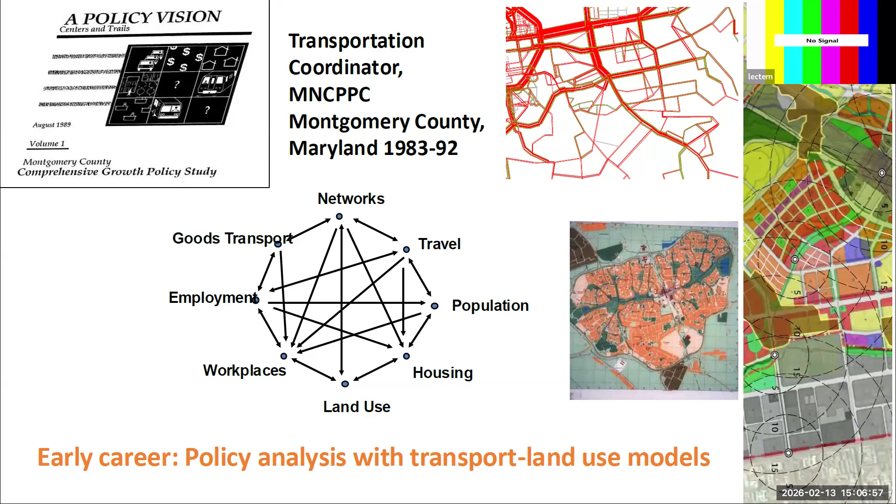And since then, these travel models have continued to evolve. I've moved, frankly, beyond regional travel demand modeling and think most of these are basically illusions that we're creating about the future being just a projection of the past, and that we're far better off developing public policy analysis frameworks that are grounded in what kind of future we want, and then figuring out how to achieve those futures through appropriate kinds of investment and policies, and then using these analytic tools to help us figure out how to get there, rather than using the tools to simply justify widening more roads, which is how they're mostly used.

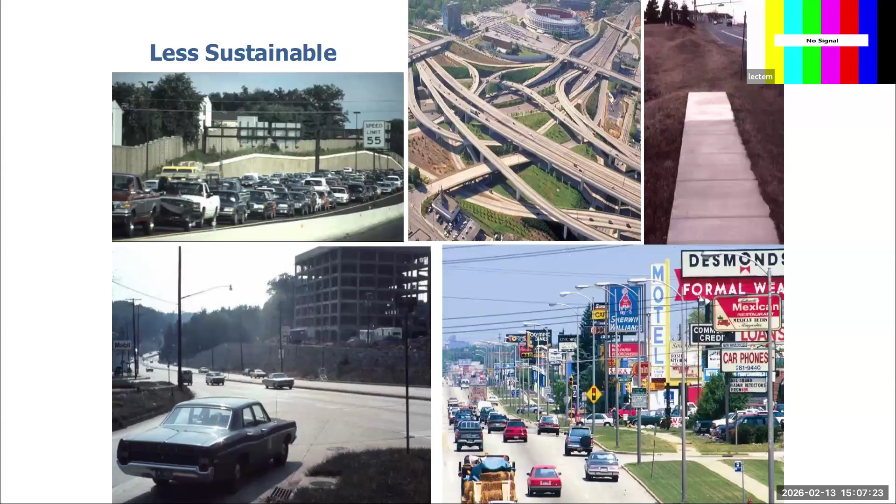So all of this comes down to a few different paradigm elements of what's less sustainable: sprawl, investment in more roads that lead to more traffic, sidewalks that go nowhere, and more sustainable patterns where we better manage street space to favor public transport, walking, and cycling, and concentrating development around those patterns.

While I was at the Park and Planning Commission in Maryland, I developed a campaign called Bikes Not Bombs, where we recycled over about a 5-year period 10,000 bicycles to teachers and health workers in Nicaragua, and used that as a way of countering US policy, which was attacking a left-wing government there that was promoting health and education. We developed bicycle assembly workshops in Nicaragua, used secondhand bikes to capitalize the bicycle assembly industry in that country, and to alleviate some of their transportation crisis.

We replicated that pattern in a few other countries, Mozambique and Haiti, and used that as a platform to develop the Institute for Transportation and Development Policy. I also wrote a book called Bicycles and Public Transportation back in 1982, 83, looking at how people come and go and get to and from public transport in different countries over the last century, and what that narrative and analysis tells us about how to make cities and regional development more sustainable.

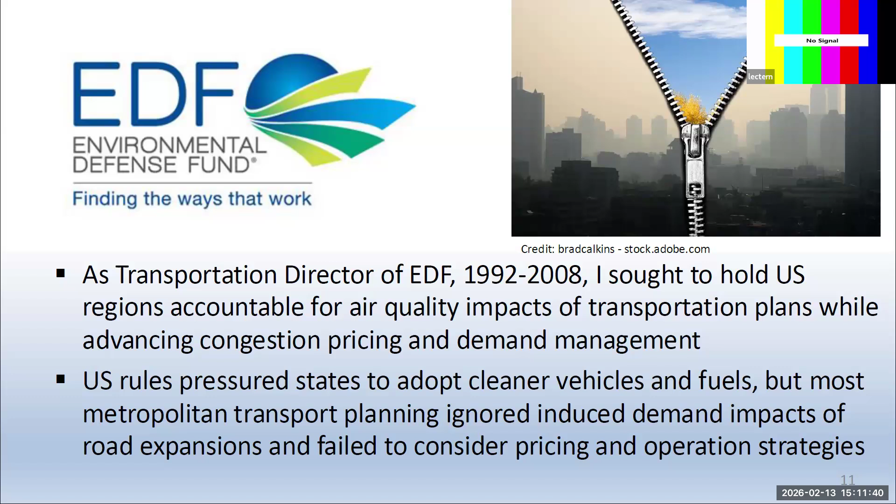Some did, but a lot of them promised to develop the public transport, but always in the out years of the transport plan, constantly rolling over the promises that, yes, we're going to build that new bus rapid transit line or rail line 10 or 15 years from now, continuing to push those promises into the future while moving forward with road expansions.

In the mid-'80s, I founded ITDP to help change policies, not just with bicycle logistics and recycling efforts in Nicaragua, Mozambique, and Haiti, but also focusing on getting multilateral development banks to shift their spending priorities towards these more sustainable modes. I did some research for the World Bank in 1989-90. This non-motorized vehicles in Asian cities report was part of the Asia Urban Transport Sector Study, and helped the bank reorient some of its policies in this direction.

ITDP has since grown to over 150 staff working in 8 or more countries and regions of the world. In fact, in 2012 we got the 8 largest multilateral development banks to pledge $175 billion over 10 years towards more sustainable transport, with annual reporting on their progress.

We developed a sustainable transport appraisal rating tool to help the multilateral banks evaluate their progress against these goals in how they were spending money and the impacts of different projects. We also did a lot of appraisal work developing sketch modeling tools at the country, regional, and global level, looking at the impacts of different transport investment and spending patterns.

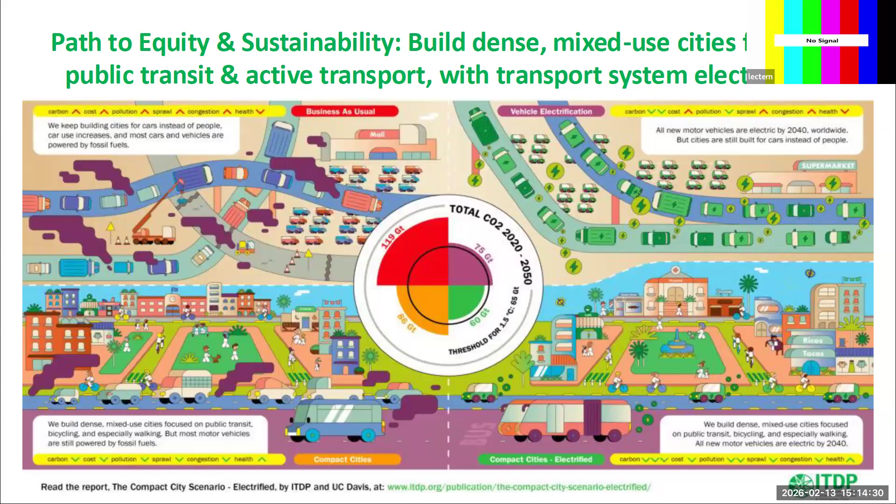We quantified in various ways how much spending would be required to implement these different strategies, and found that by combining compact development with electrification, we could cut direct global public and private costs of urban passenger transport by one third, or roughly $5 trillion annually going out to 2050. There's a lot of detail behind this, with citations for much of it.

We spent a lot of effort at ITDP developing different standards for more sustainable transport, looking at street design, transit-oriented development, bike sharing, bus rapid transit, and electric bikes, and also working with partner organizations promoting the adoption of electrification goals in vehicle technology deployment in transport. I think there's a huge role to be played through development and adoption of standards.

So I want to turn now from that global picture to the work I did starting in 2015.

I went to work for New York City Department of Transportation as Deputy Commissioner for Policy for 6 years under Mayor de Blasio and Commissioner Polly Trottenberg. New York City DOT is responsible for all of the streets, highways, and bridges that are not toll bridges or toll highways within New York City.

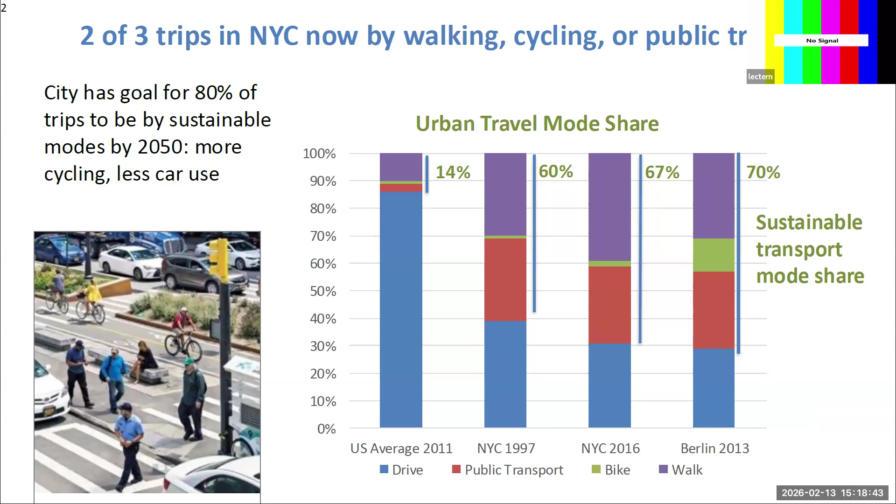Looking at peer cities around the world, like Berlin, which is already at 70%, New York is moving in those directions, despite the issues that we had with COVID setting us back in certain areas. We're still continuing, I think, in largely the right direction.

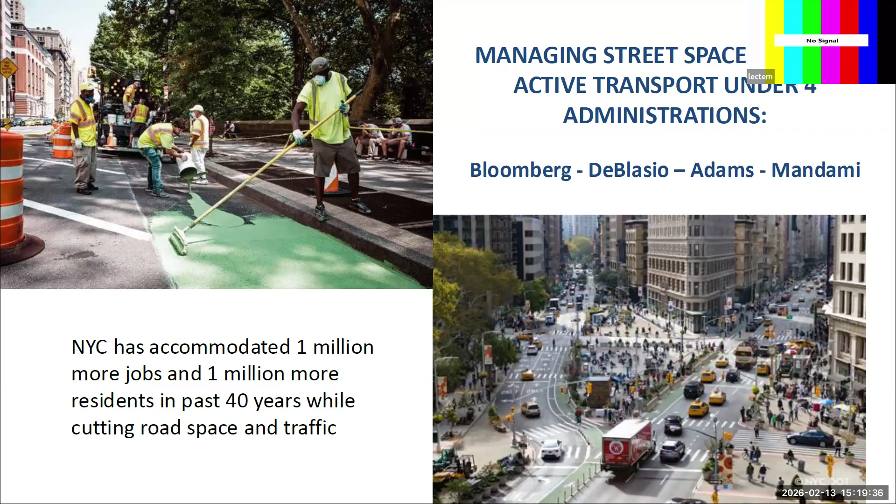This has happened through 4 mayoral administrations. We had some slippage under the last one, Mayor Adams, who left under a cloud of corruption scandal. But Mayor Bloomberg laid the foundations for this transformation back in the 2000s. Bill de Blasio came in 2014, and then Mamdani just got elected and took office a couple months ago, and I think his promises to become a very effective mayor, especially on transport in the public realm.

As I mentioned, Vision Zero has been a key goal. It was first put forward as a larger framework under Bloomberg, which laid some foundations for this, but when de Blasio ran for mayor in 2013-14, he made this a centerpiece of his first run for office.

The idea is that the only number of people that's acceptable to be killed in the traffic system is 0, that we should take a safe systems approach in designing and operating our transportation system, just like aviation takes, and saying that the roads should be forgiving of human error. The price of making a mistake in the traffic system should not be a death penalty. You can't stop all crashes, but you can make the consequences less severe.

We did also recognize that federal action is needed to help support and achieve these goals, particularly because the federal government controls vehicle design standards.

The key cornerstones of our Vision Zero initiative, which was quite successful, was to cut the citywide speed limit, to adopt more effective safety education, to do stronger enforcement of traffic laws with both police and cameras, and redesign streets and intersections for safety.

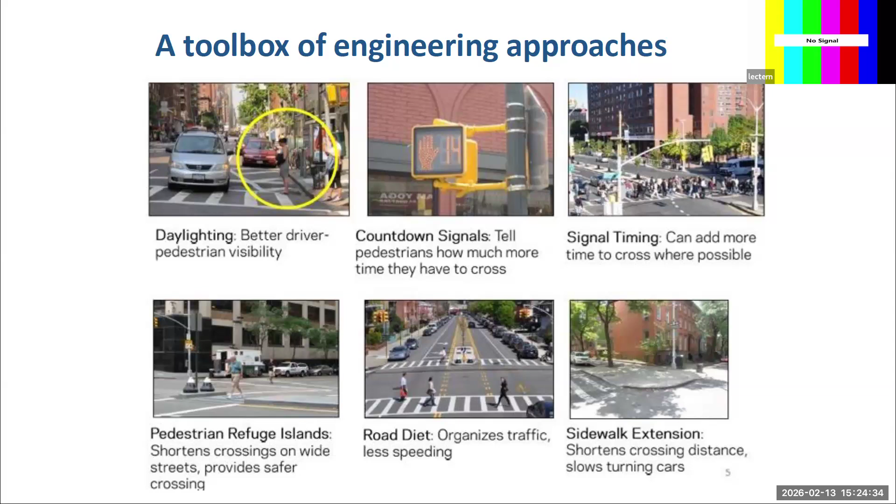Signal timing was used too. In some cases, we were designing arterials so that the traffic speed for the green progression was set at 15 miles an hour, which was the speed of bicyclists on the street, favoring cycling traffic and better traffic interaction. Better refuge islands, road diets to narrow streets, sidewalk extensions, and the like. With these tools together, we were able to transform some of our major arterials, which were the most hazardous in the city, into places that were safe to walk and cycle.

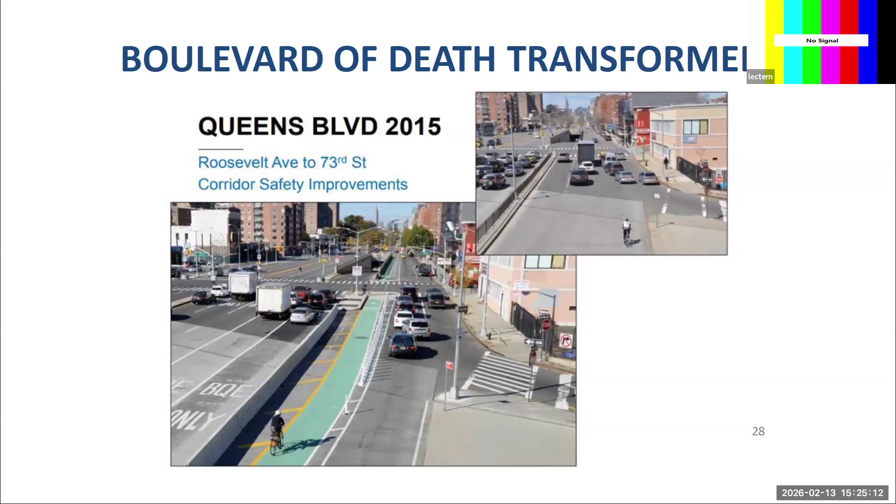Queens Boulevard had been known as the Boulevard of Death because as many as 18 people were killed a year in a 6-mile stretch of roadway in the late 1990s. After we implemented these improvements in 2015 to 2018, as you can see with the before and after images here, we were in fact able to bring down road fatalities. So we went 3 years in a row with zero fatalities on this roadway that previously had a huge number.

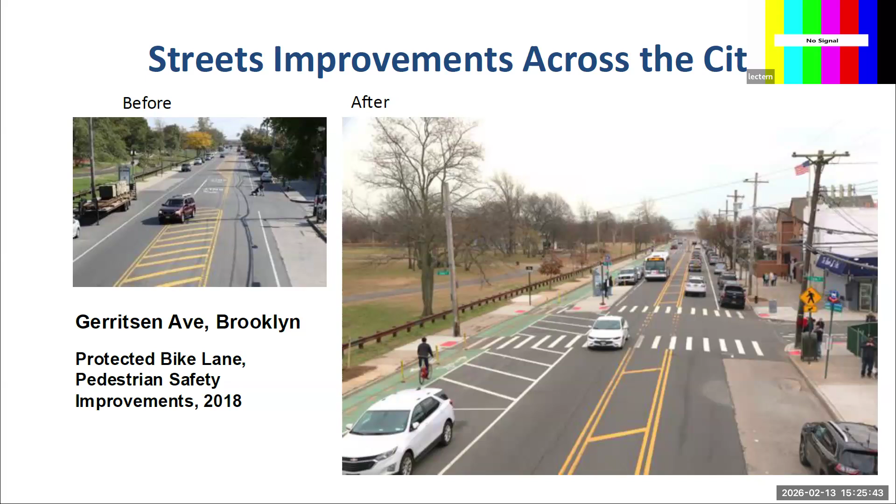And we replicated that on other major corridors across the city with various kinds of street improvements, protected bike lanes, pedestrian safety improvements. Again, you see before and after images. We implemented left turn traffic calming at hundreds of intersections across the city to reduce the speed of turning vehicles so that drivers were less likely to kill or injure people in crosswalks.

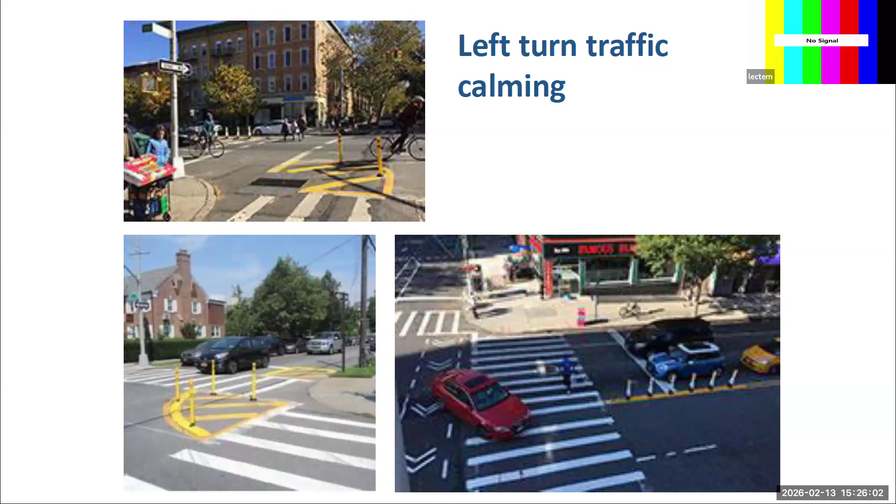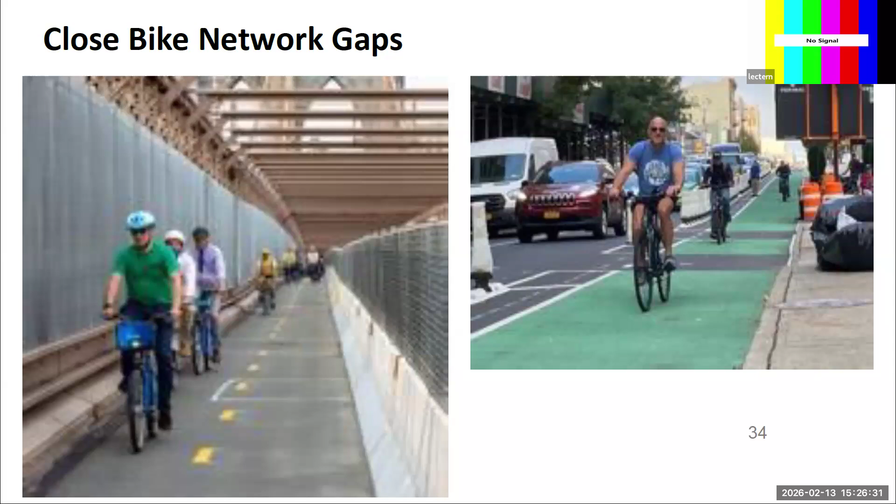We implemented over 1,000 kilometers of protected cycle lanes, 2,400 total as of last year, and closed a lot of the gaps in the network. We found network gap connectivity, closing those gaps, was one of the most strategically important things we could do. This is on the Brooklyn Bridge where we'd had a key gap, and we tried to create a lot of these parking-protected bike lanes on different avenues.

During the COVID era, of course, like cities around the world, we experienced significant changes in transportation patterns, but used that as an opportunity to reconfigure a lot of our streets, to expand the bicycle network, and to expand opportunities for walking, cycling, and public space in streets.

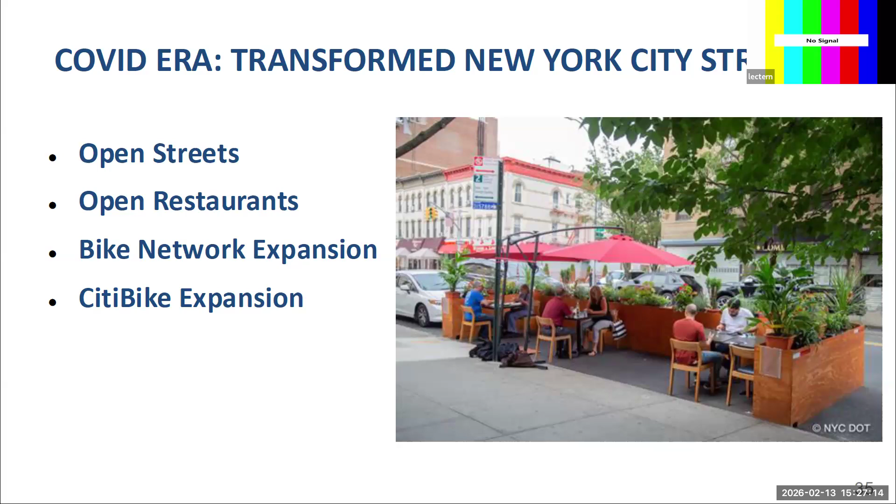We developed, and I created the architecture for, our Open Streets, Open Restaurants program, in which we converted 10,000 parking spaces into restaurant space and saved over 100,000 jobs in the restaurant industry at a time when the city was feeling really bad because everybody was stuck inside, and it felt like the city had sort of socially collapsed in certain ways.

The Open Restaurants program was successful in no small part because it was a bottoms-up, rights-based program. With simple criteria, we told restaurateurs that if they could meet half a dozen simple criteria, they could take street space or sidewalk space and put tables and chairs out and open up, and we would come back and do compliance inspections to make sure they were in fact following the rules after the fact. This self-certification with compliance checks showed how nimble city government could be if it got out of its own way in trying to implement reforms in street management.

Unfortunately, a lot of the benefits of the open restaurants program were destroyed in 2024 when a much more pro-car city council put through a bill that required the sheds for restaurants to go into storage in the winter for several months. The number of restaurants in the program fell by three-quarters. The new mayor has pledged to reverse this, and we have a new city council with the council chair and the transportation committee chair much more supportive of restoring this program in an effective way.

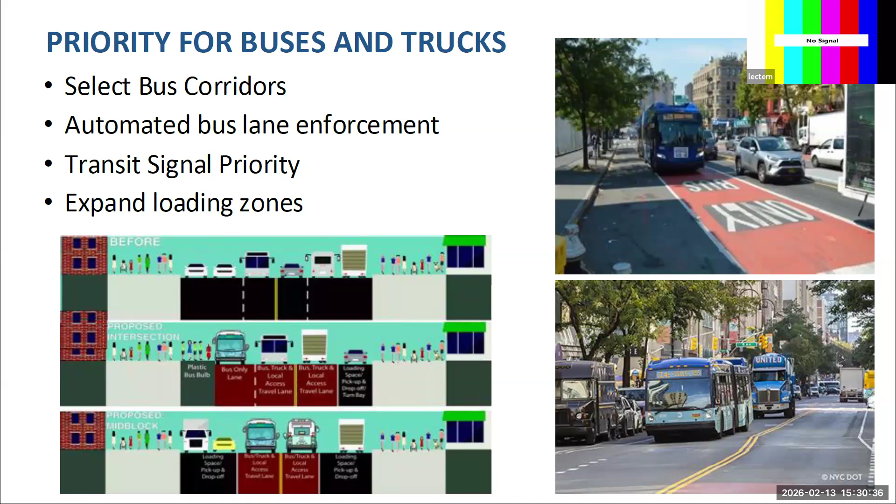We've also done a lot to give more priority for buses and trucks with select bus corridors, automated bus lane enforcement, transit signal priority, and expanded loading zones. This is 14th Street in New York, which used to be one of the slowest cross streets, now operating very effectively as a complement to the subway that runs underneath that street.

Here you see the 14th Street transit and truck priority lane. Trucks can go through on this along with buses, but cars can only access a block at a time, and then they have to turn off. So they can access for pickup and drop-off only.

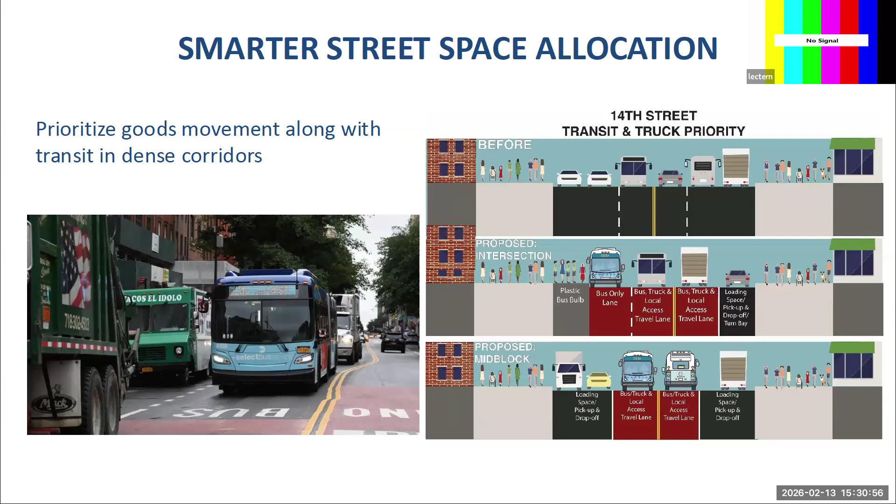Still a lot of conflicts over loading and unloading in the city, and over the rules by which trucks pay fines for double parking and things like that. I spent a lot of time trying to reform these systems, so that there were not so many incentives for the trucking industry to just regard traffic violations as a cost of doing business, but to focus on creating a culture of compliance with traffic rules.

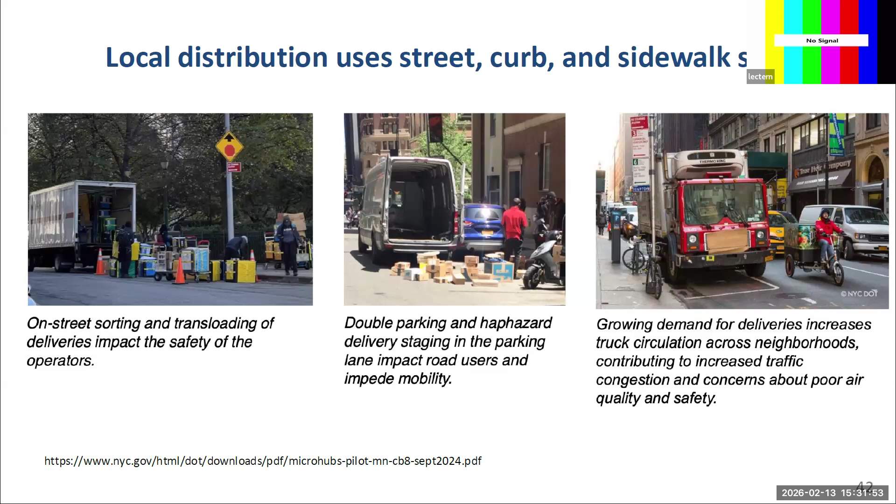We've done a lot to also develop better loading and unloading zones. A lot of informal loading and unloading has been going on in New York streets for a while, in curb space, legal or illegal. Now we're trying to create more micro freight hubs in the city so that we can reduce congestion and make these systems work better.

The off-hour deliveries program has successfully encouraged a lot of truck deliveries to take place in evening and early morning hours, with support for low noise cargo handling equipment. Truckers can in fact make 2 or 3 times as many deliveries if they deliver in off hours compared to delivering during the heart of the day in denser, busy neighborhoods.

But of course, truckers often don't control when they make deliveries - it's really up to the receivers. So a lot of this was support for the receivers to adopt these systems for off-hour access.

Congestion pricing is a real success story in New York, and speeds in the city since we implemented this after a long, long struggle - it's been in effect now for a little over a year - we've got a 7% increase in weekday speeds, and weekend speeds are up over 10%, within the core area. This is after 3 years of declining speeds in the central business district.

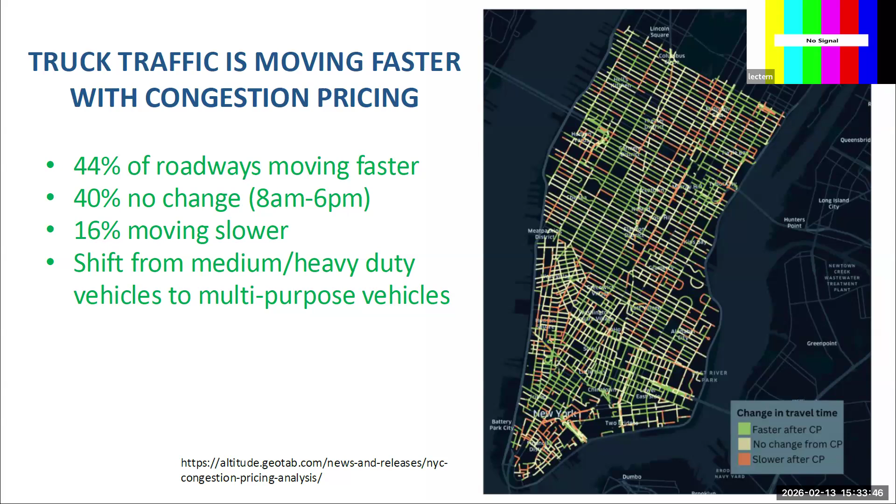Benefits have spilled over also to areas outside of this charging zone, which are experiencing lower traffic, lower noise, better safety, less pollution. Traffic's moving faster with congestion pricing on a majority of roadways, and there's a greater shift from medium and heavy duty vehicles to multi-purpose vehicles for deliveries.

Pedal assist cargo e-bikes are playing an increasing role in New York City. There's a big conflict over vehicle dimension and speed requirements in the regulations.

We basically started a pilot under my leadership to give pedal-assist e-cargo bikes free access to any commercial parking space or loading space in the city at no charge, and also allowing use of bike lanes in the streets and loading and unloading on sidewalks with a clear path. So now we have several thousand of these making deliveries in the city, often replacing smaller trucks one-on-one, boosting productivity of the freight system and reducing congestion.

Cities are now piloting e-cargo bike ferry connections, as you've seen also in Paris and Brussels and some other cities.

Secure bike parking is a place where New York's falling short, and half of delivery workers have had their bikes stolen. We've got a grossly inadequate number of places to securely park bikes, with over 2 million New Yorkers owning a bike and only 24,000 racks in the city.

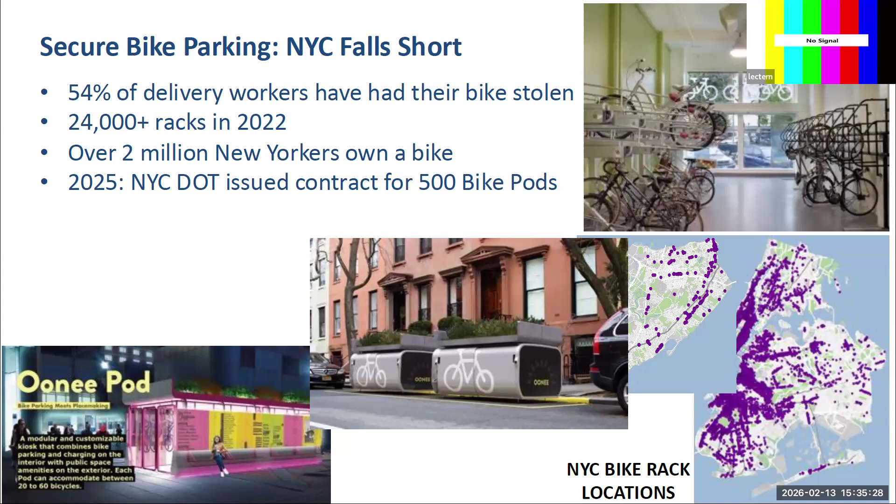The city, after years of dragging its feet, finally issued a contract to create 500 bike pods like the one you see in the center and bottom there, which will be neighborhood-based secure bike parking.

E-bike safety is an issue in the city, largely driven by inadequate federal regulation over battery technologies, and so there are fires caused by badly manufactured or badly treated e-bike batteries that get charged sometimes in people's apartments, sometimes in large quantities. The city's created a battery swapping pilot program and is working to make sure that delivery drivers using these e-bikes get access to safer technologies.

So continued conflict over e-bikes and where they should belong and what the speed limit should be. The city won authority in 2024 to set a 20-mile-an-hour speed limit citywide. I and many others advocated for the city to match bike and motor vehicle speed limits to make them more easily understood and enforceable, and to make it overall safer.

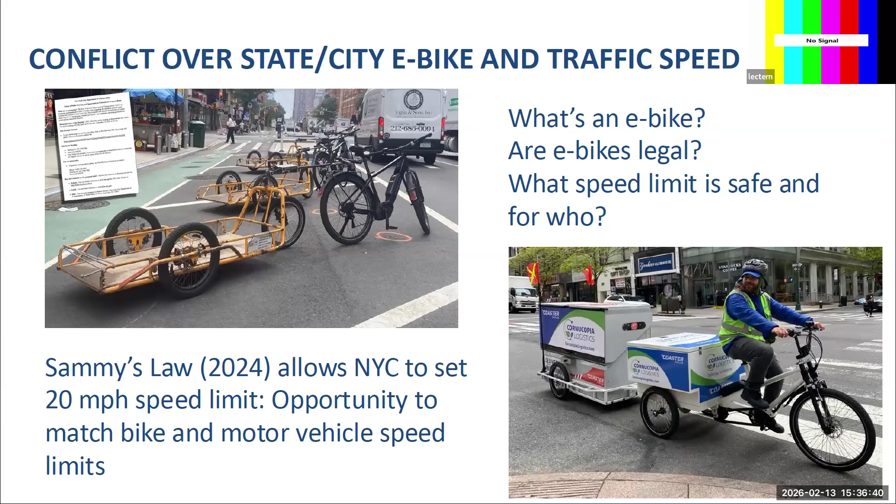But this is a continuous controversy. The city instead lowered the bike speed limit to 15 miles an hour, and the police commissioner started to issue criminal summonses against the bike delivery drivers, many of whom are immigrants.

And it's become an instrument for the federal ICE people to grab people and deport them from the country for simply going 20 miles an hour on an e-bike or running a red light. So there are protests in the city by delivery drivers and things like that.

So conclusions about New York City: the COVID epidemic showed that the city could be creative and nimble and innovative and reallocate street space and empower stakeholders to make change quickly in good ways. But the city has also faced major constraints under its procurement rules and the politics of trying to change institutional practices.

But public-private partnerships like our Citi Bike program have shown that they can be very effective at delivering results through innovative work together. That parking and road user charging can make a big difference. Street space allocation, use of better apps and regulations are all areas of opportunity.

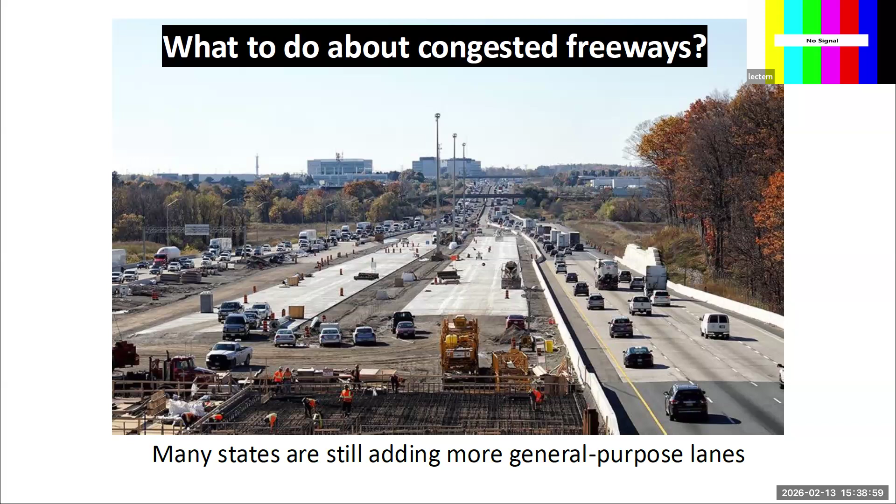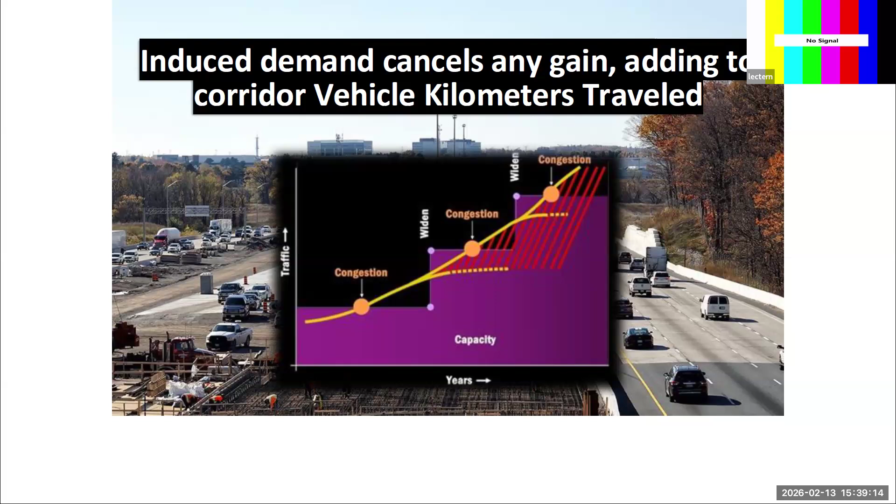A lot of places are still adding more general purpose lanes to deal with congestion on motorways. But as we add motorway capacity, induced demand cancels gains, often in a matter of a few years, adding to more traffic. And a lot of states have developed managed lanes, many of them HOV lanes for high occupancy vehicles.

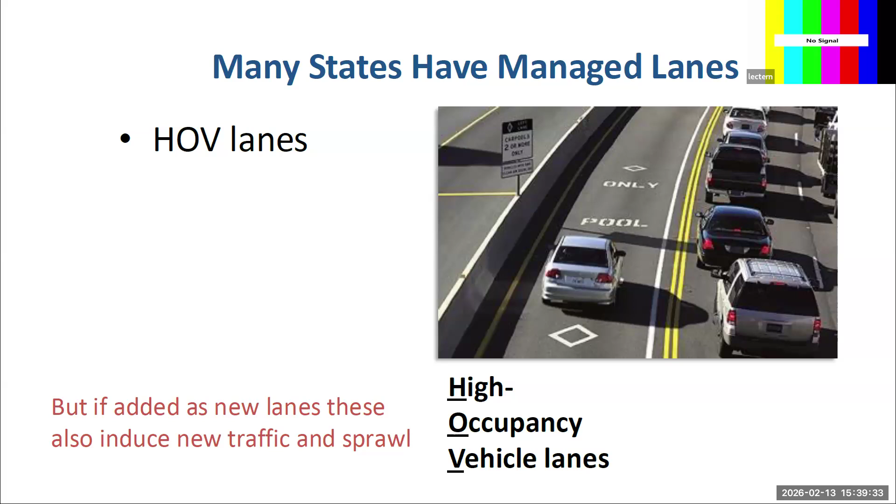But increasingly, the emphasis has been on high occupancy toll lanes that may give a discount or free travel for carpools. But if these are additional lanes, they still induce more traffic and sprawl. And so these are also costly, and it takes years to build them.

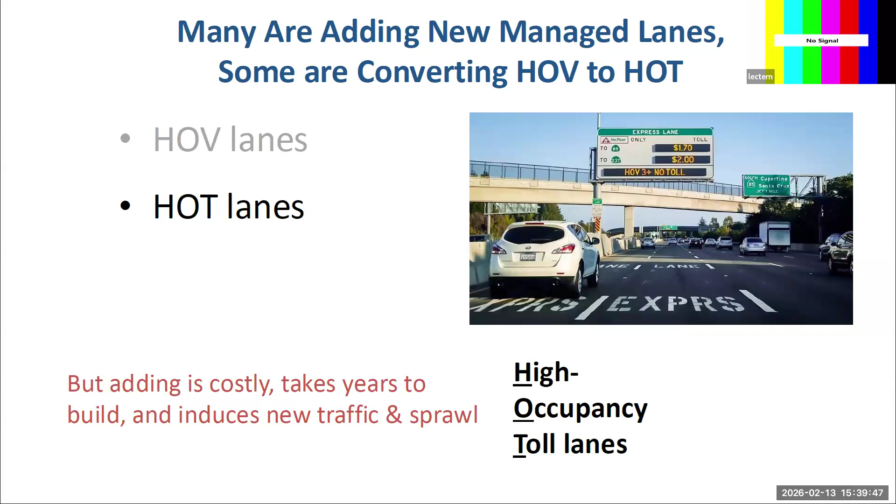They induce more traffic. So a new type of managed lane that I've been working with some other partners in promoting is 'hotter lanes' - a bit of an awkward acronym: high occupancy transit and tolls on existing lanes with rewards. I didn't invent this term. It came from Pat DeCorla-Souza at the Federal Highway Administration.

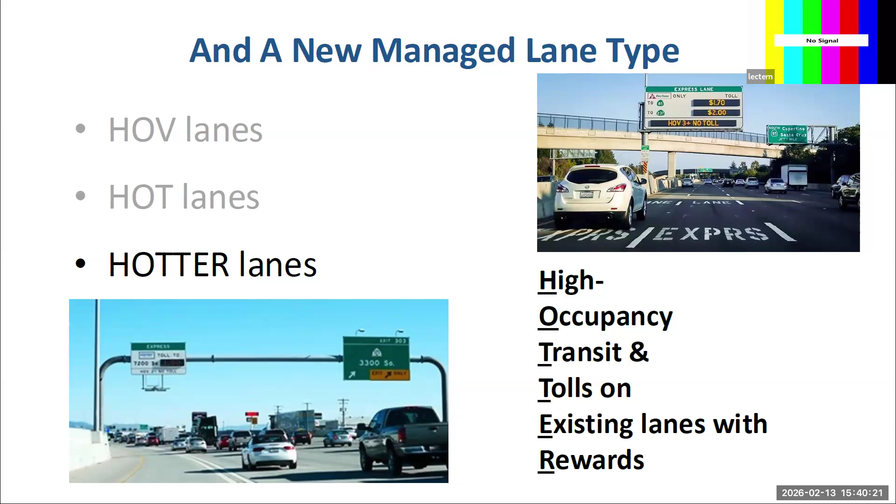For now, it stands as a way of talking about a different way of trying to address the pressures to deal with traffic congestion without widening roadways. So HOTTER lanes look like HOT lanes, but they boost efficiency of the existing lanes by pricing some of the lanes while paying incentives to travelers who share rides.

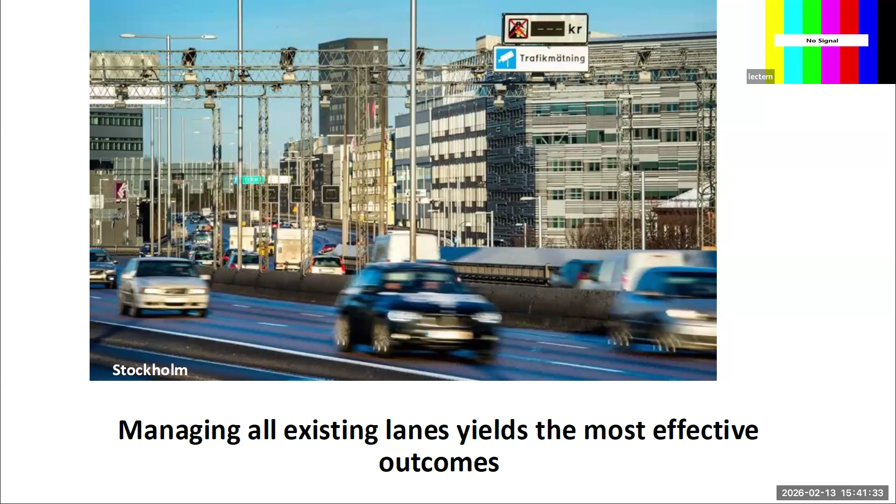Managing all of the existing lanes yields the most effective outcomes, as we've seen in New York City, Stockholm, Singapore, and other places. Congestion pricing works.

One of the things I've been talking about is integrated congestion and multimodal mobility management, or IC4M, another awkward engineering acronym, but basic principles of: add no new lanes or road space when adopting managed lanes, toll the existing lanes instead, use behavioral approaches to achieve desired outcomes, and advance equity by reducing car dependence, expanding travel choices, and boosting efficiency. The key elements are not just the physical lane, but also operational and behavioral elements, giving people better support, better information, real-time communications, and incentives.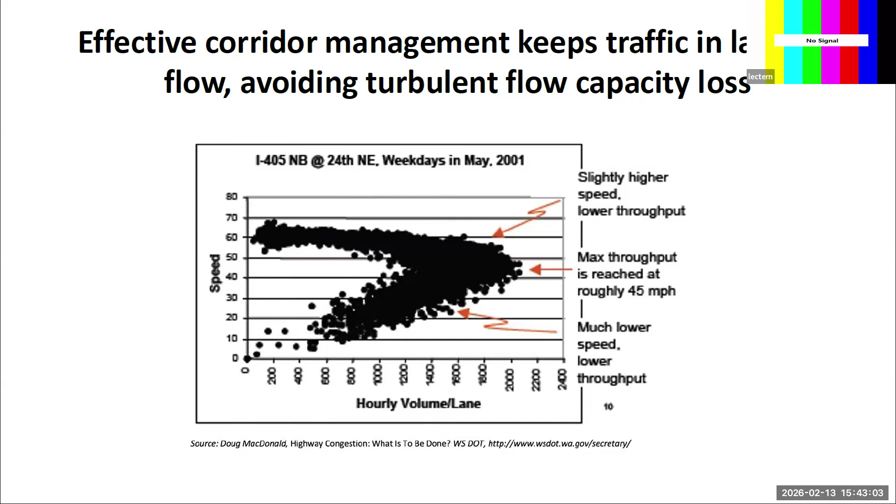Understanding how traffic science works, effective corridor management keeps traffic in laminar flow conditions and avoids the loss of capacity that happens with turbulent flow. When we're in this flow regime, we're moving at 60 miles an hour until maximum throughput is achieved, then we fall out of laminar flow into turbulent flow, and suddenly throughput drops to 600 or 800 vehicles per hour per lane instead of 1800 or 2000. This shows laminar flow in the upper picture, turbulent flow in the bottom picture.

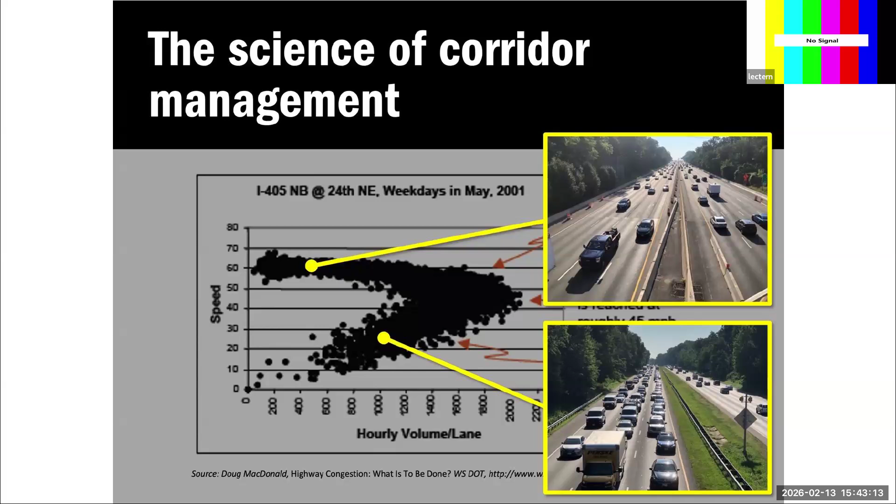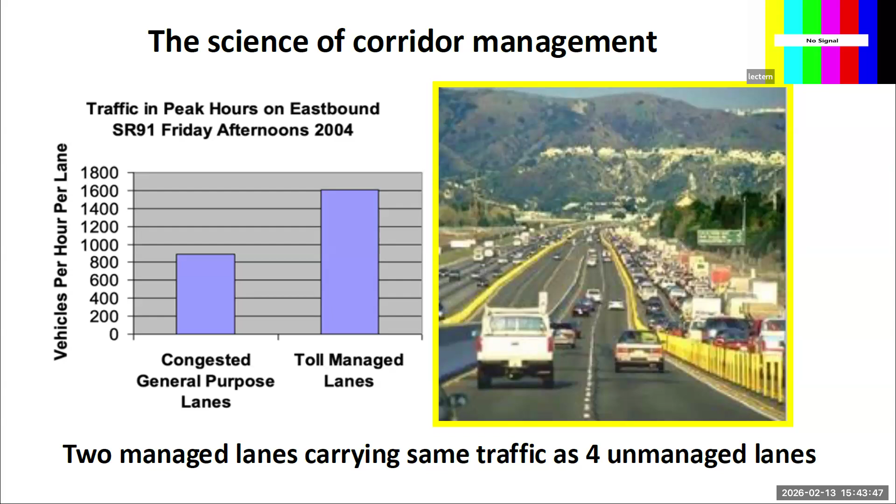Here's another image of it. This is State Route 91 in Southern California. The congested general purpose lanes, there are 4 of them, carry only 900 vehicles per hour per lane. The 2 toll managed lanes carry 1,600 vehicles per hour per lane at twice the speed. So those managed lanes are kept in laminar flow, carrying as much traffic as the 4 unmanaged lanes. If you manage all of the lanes, tolls can be lower while protecting from a loss of peak period road capacity during the times when you want it most.

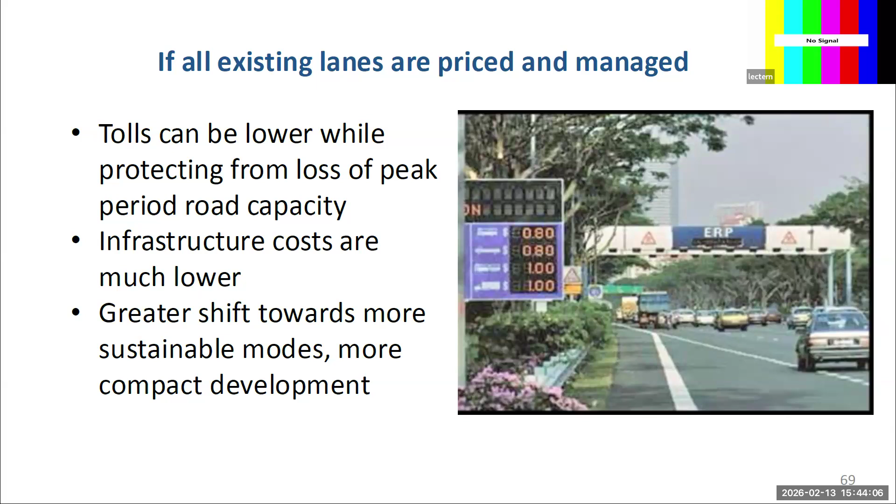Infrastructure costs are lower, and you have a greater shift towards more sustainable modes. But what if state and local politics aren't ripe for congestion pricing or a pure hot lane approach, which we've seen time and again in various places? Congestion pricing almost died its last death in New York City right before it was implemented, when the governor pulled back from it in political fear before she changed her mind again.

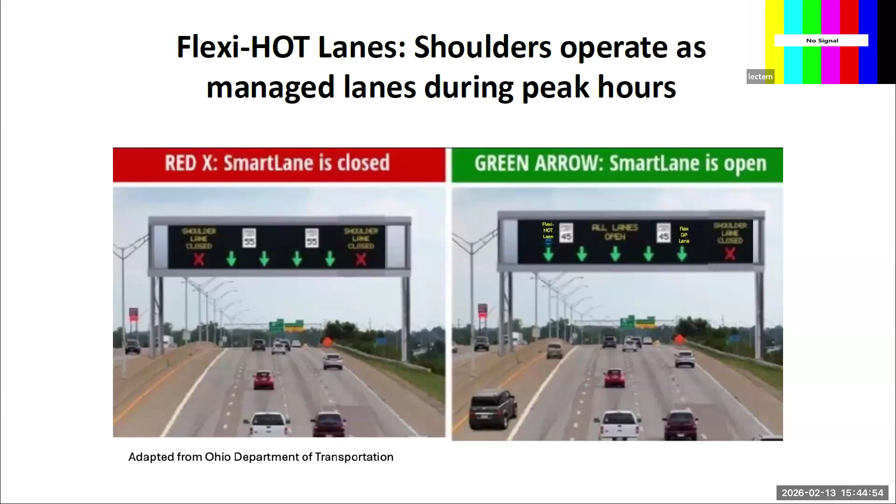I've been working again with Pat DeCorla-Souza at Federal Highways on this idea of flexi hot lanes, taking a baby step towards congestion pricing by operating shoulders, where you have enough capacity, as managed lanes during peak hours, using overhead signage and things like that. And then also bringing in app-based vehicle occupancy detection for toll discounts or incentives. This has been proven.

It's being used in places like Dallas, Fort Worth, Texas. It's a Bluetooth-based and smartphone-based app system that allows toll discounts to be given to users in specific corridors at specific times of day on managed lanes. Use of this app in Dallas has cut the number of HOV violations on these managed lanes from over 30% to under 2%, and they're processing 500,000 verifications monthly. You can use this technology to price any road, anywhere, anytime, without driver distraction and with privacy protection.

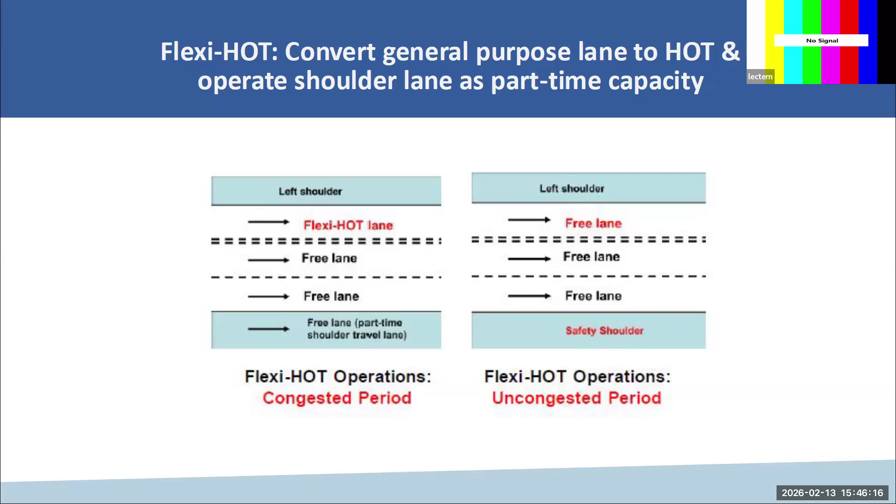So I think there are some tools we can bring to bear. I just recently did a paper, just wrapping up, to convert general purpose lanes to hot lanes and operate shoulder lanes as part-time capacity, doing this just during congested periods. We found, in this modeled approach, that in 8-lane, 6-lane, and 4-lane expressways under moderate or severe congestion, this approach could deliver better travel speeds on these networks without widening the road and at much less cost.

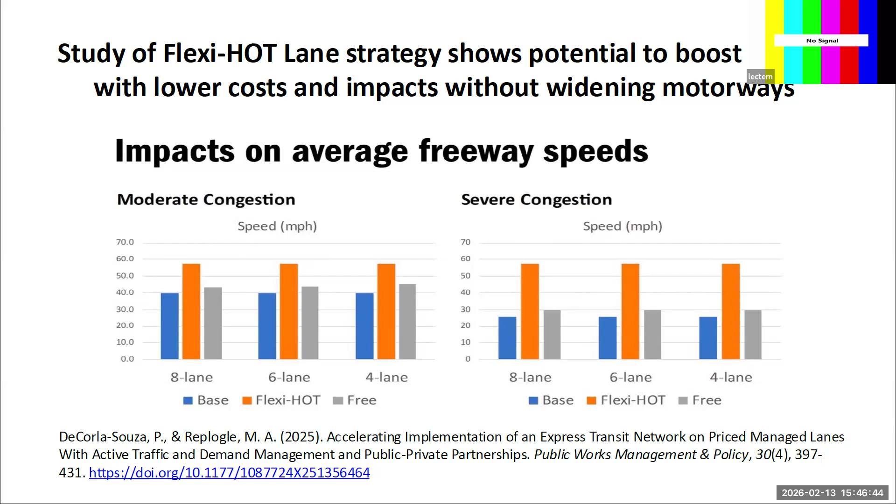So with that, I'll close and invite your questions and comments. Thank you.

Well, anybody wants to start? Let's give the students maybe.

How did you deal with politics or with stakeholders or implementers who may be against your recommendations, about active travel?

Of course, all of these areas are fraught with political challenges, but we've also found, for example, in New York City, congestion pricing was on the ropes and being on the verge of being stopped by a Democratic governor after it had already been approved. It was within 30 days of turning the key and starting to collect the tolls, because all the gantries were in place, the governor decided, oh, if she implements it 6 months before the November election, it might cost the Democrats a couple of seats in the House of Representatives.

And so she said, no, we're going to stop this. And so it didn't make a difference in the election. Everybody agrees that it didn't. But right after the election, then she reversed course again and put it back in.

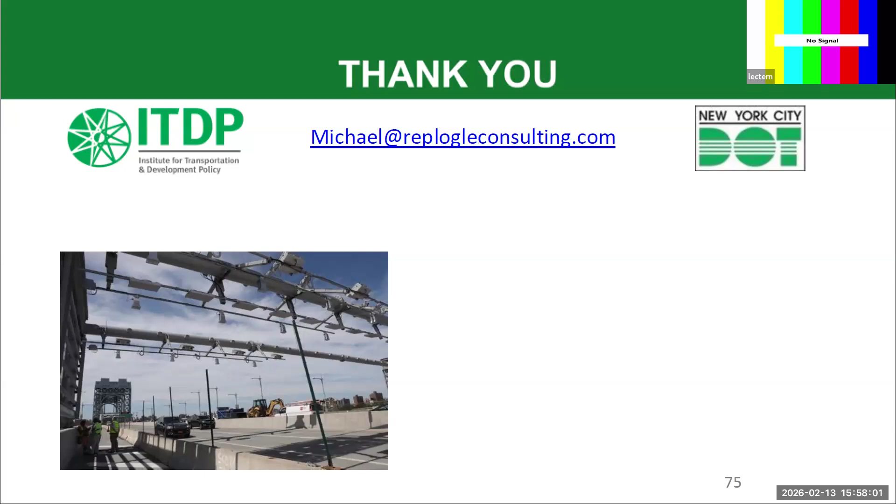I'm a big believer in trying to move towards urban traffic corridor and system management as a public utility, where public elected officials set goals for network reliability, efficiency, modal outcomes, and environmental outcomes, and then give the agencies responsible, or public-private operators or concessionaires, the authority to make adjustments within parameters of how the system is operated to achieve those goals — just like we do with electric utilities in many places, where we tell the utility operator we want high reliability, we don't want brownouts and blackouts in the system all the time. In fact, we tolerate brownouts and blackouts in our surface transport networks on a routine basis because we don't have competent governance and management structures for those networks.